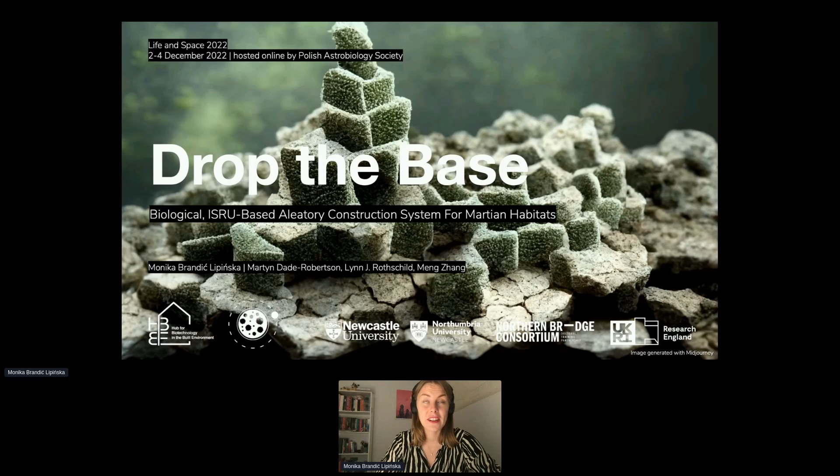So as Niels presented pretty well, when we go to Mars, we cannot take as much with us as we can to International Space Station or even to the moon, because it's much, much further away. So we have these two construction systems that we're using or planning to use right now. The first one is to bring everything from Earth, the same way as International Space Station was constructed. And the second one is in situ resource utilization, so basically the use of local resources.

The first one consumes a lot of costs because you have to take literally everything with you, and it's very costly to launch things from Earth. The second one also might be very cost consuming because of the machinery that we might need to process regolith, for example, to gather it, to sinter it, or create a 3D printing paste and 3D print and then assemble habitats.

So thinking of building on Mars, we kind of need an alternative approach or something to add to these approaches to make it more efficient. And that approach could be growth. So having this possibility of growing habitats, we might have structures that are capable of responding dynamically to the environment and are capable of maintaining and healing themselves because they're living, so they might adapt and change.

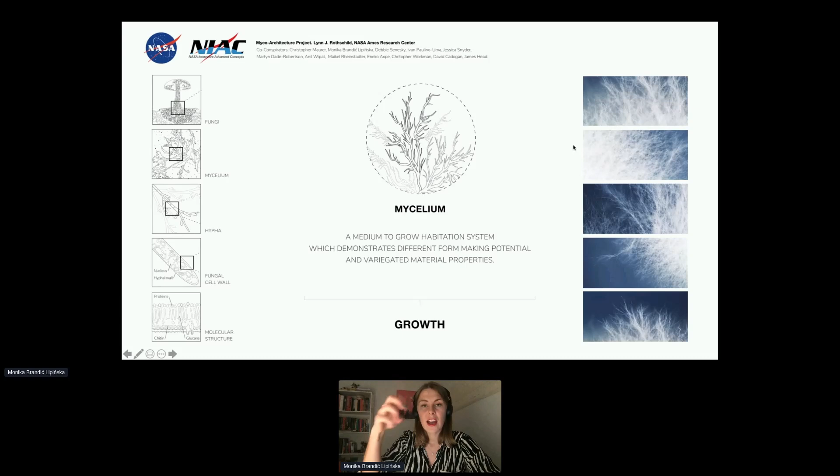So the project that I'm working on started when I was back in my internships at NASA Ames Research Center in Lynn Rothschild's laboratory, where we were working on the project called Myco-Architecture Off Planet, which was utilizing mycelium, which is a vegetative root part of fungi that you can see here on the pictures. It has this branching thread-like hyphae. And the idea was to use mycelium to build or grow the habitat.

The approach that NASA is investigating and developing is a standalone approach, based on inflatable structures. So basically you bring an inflatable bag, which is the habitat, from Earth. You add water, sunlight, carbon dioxide, which all is present on Mars. And then the structure grows and becomes filled with mycelium, and it creates this mycoshell structure.

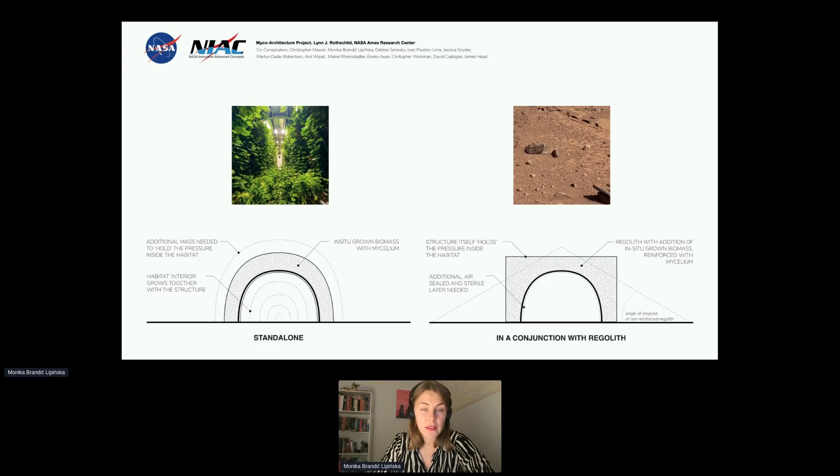The approach that I'm developing in parallel to NASA's project is an approach in conjunction with regolith. So I'm trying to use mycelium as a reinforcement for the regolith. So while growing it, I want to use minimum amount of biomass because we don't really have the biomass on Mars. That's something that we would create when the humans are there, and we will have greenhouses.

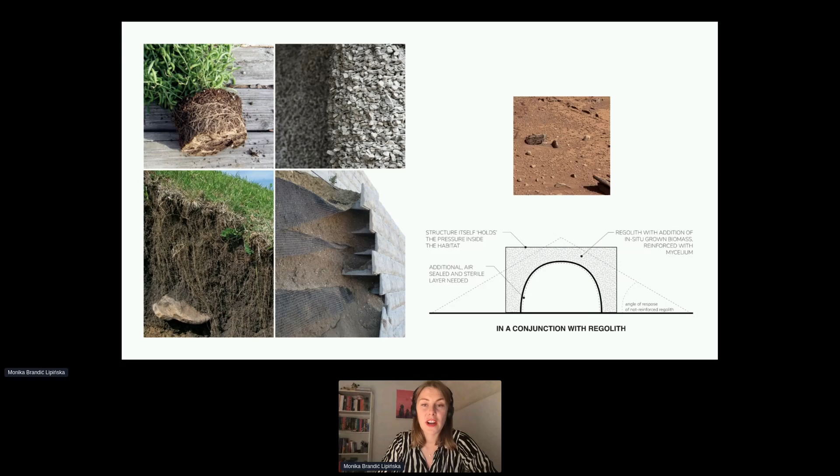But also the ideal scenario is that we would have this closed loop life support system, so we wouldn't really have much waste or plants that we can utilize for other purposes. So here the idea is to use the minimum of biomass and just somehow grow mycelium within the regolith, so it reinforces the structure. So the way mycelial components work is that mycelium, this vegetative part of fungi, secretes enzymes that dissolve their food and bond with the substrate on a cellular level.

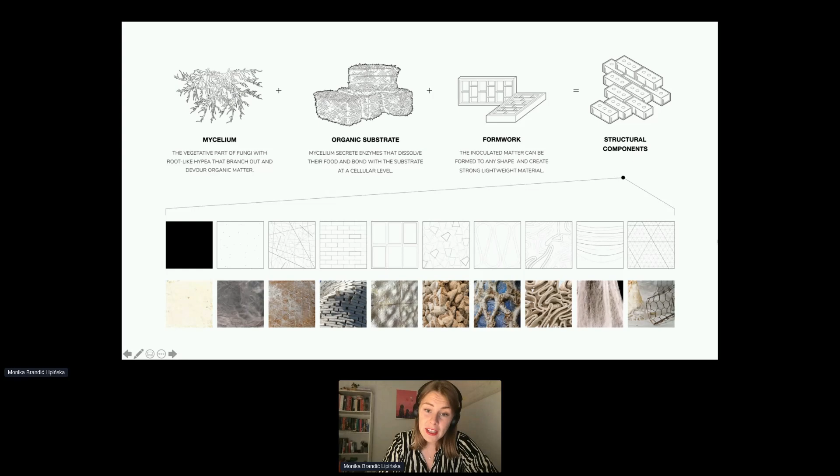So you can take any kind of organic substrate like beechwood or sawdust, anything that is lignocellulosic based, and mix it with mycelium and then put it into some kind of formwork. And then after a certain time of growth, you have structural components. And here on the bottom, you can see many different variations of that. It's either bricks or panels or smaller elements or 3D printed mycelium. So it gives a lot of possibilities of what you can actually achieve.

And it has very great properties, and it's been used on Earth more for artistic installations and small architectural pavilions rather than actual buildings, but it's also used for thermal insulation, for example, because it has very great thermal insulation and fire resistant properties.

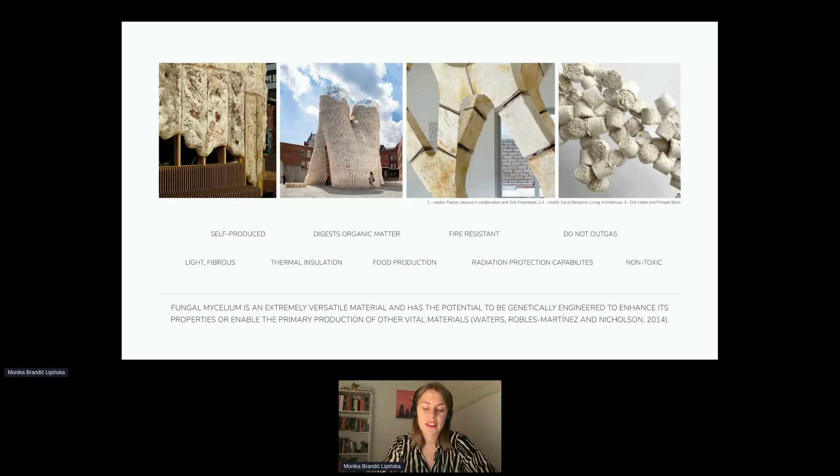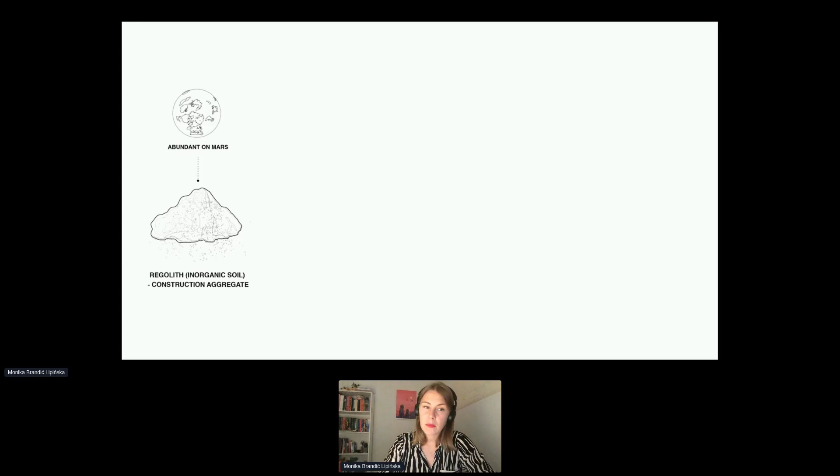But what is the most interesting for use of it in space is that it's self-replicable and self-healing. So we can take just a little bit of it with us and then replicate it in destination. So the idea is that we would use mostly regolith, which is abundant on Mars. And then for this organic substrate, that would be waste from the greenhouse, but just the minimum of it.

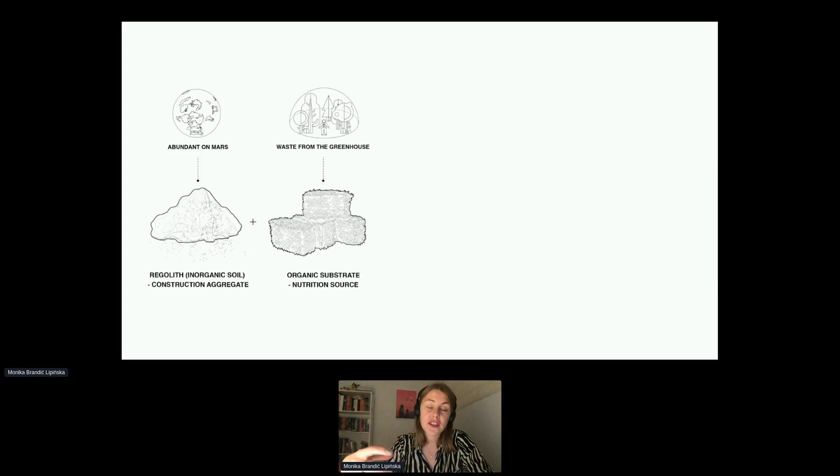Or it could be also like an algae or cyanobacteria that could feed on carbon dioxide present in the atmosphere, produce oxygen, and then mycelium use that to grow as a nutrition source, but also as an oxygen source. The other actor in this play would be mycelium that would have to be brought from Earth, but again, it could be replicated in situ, so we don't need really that much to take with us.

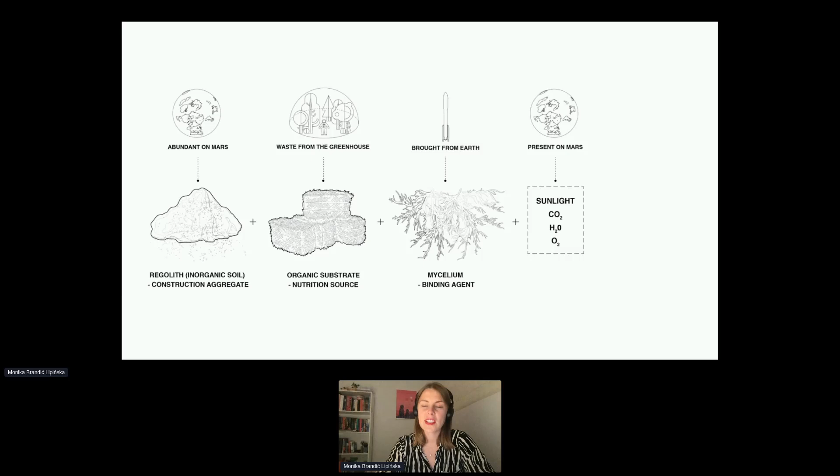Sunlight, not really necessary for mycelium growth, but in case of cyanobacteria, we might need that. Carbon dioxide, water, and oxygen, all present on Mars, or could be somehow extracted or processed. And then finally, we need some kind of casting, biowelding strategy of how to actually make structural components out of these elements. So this is what artificial intelligence shows when I typed mycelium-based habitat on Mars.

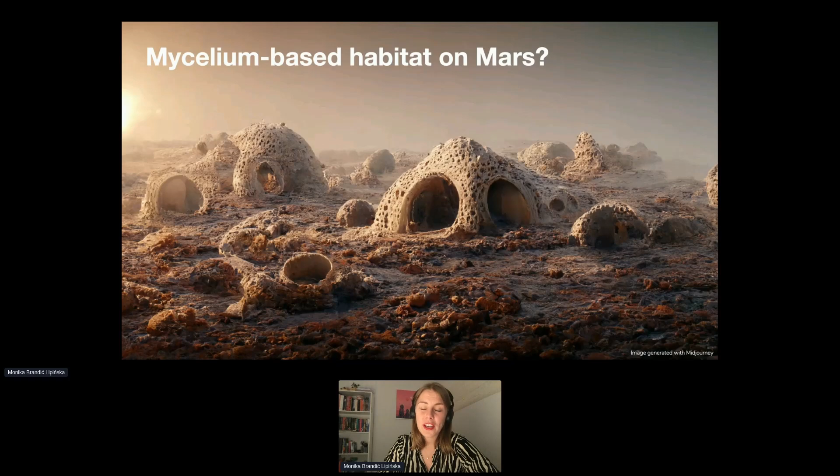And what I'm working with, it's a little bit more bottom-up approach. So I'm trying to figure out if it's even possible to grow mycelium on regolith and how it might interact with each other and what are the mechanical properties, and later on how it might translate into creation of the structure. So the goal of my research is to develop a biofabrication strategy for stabilizing regolith using mycelium to construct inhabitable structures. And what is really important is that it's in resource limited conditions. So again, I'm trying to minimize, for example, the biomass.

And that approach responds to a lot of different goals connected with human exploration of space and especially Mars, which are associated with creation of the habitat. So for example, reliability, long lifespan, planetary protection, where here it would be an additional issue to solve because we're introducing living material. So we have to make sure that there is no forward or backward contamination, and we're not spreading this new form of life on the Martian surface.

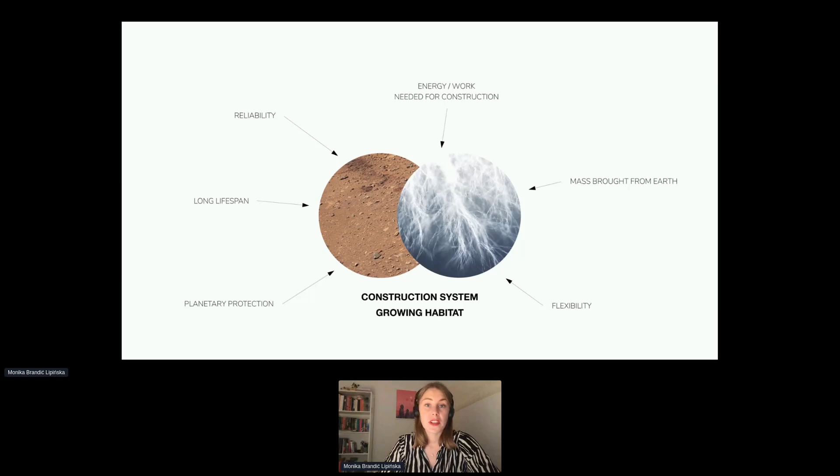And the other thing is the mass brought from Earth, that we're saving what we need to bring with us. And it gives us flexibility because we can grow the habitats or extend the habitats while the mission progresses, or with new mission types and mission needs, we can adapt the habitat to the needs.

There are additional aspects that in a far future have to be taken under consideration to make the project actually work on Mars, like environmental conditions, the chemical composition of actual Martian regolith, the nutrition source, because it will differ if we're using parts from the greenhouse, or it will differ if we use cyanobacteria or algae, and then finally mycelium species.

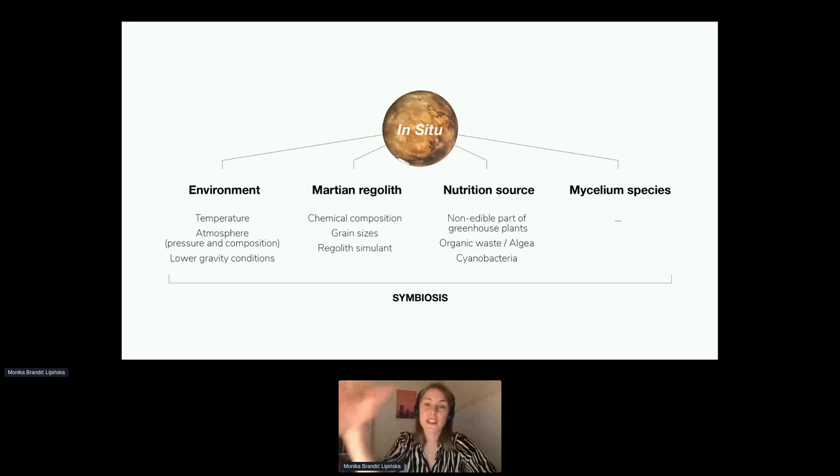So how to choose mycelium species and nutrition source that will be in symbiosis with the regolith and working also in these extreme environments. We wouldn't grow it just like that on the surface because, again, planetary protection. So there would have to be some kind of closed environment providing the right temperature, right pressure, but still these 4 elements have to work in a symbiosis and they have to be carefully chosen.

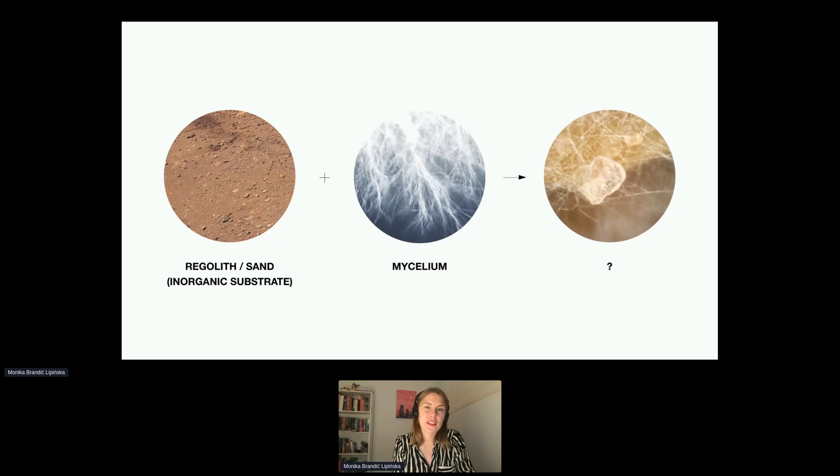Right now, I'm working with Ganoderma lucidum, which is one of the popular mycelium species used for architecture purposes. And for now, I'm working with sand, so not really regolith. So it might change because of the grain size and chemical composition. But I wanted to see if it's even possible and how the structure works and the interaction between these two. So I started with doing experiments growing mycelium on sand with a little bit of beechwood on petri dishes.

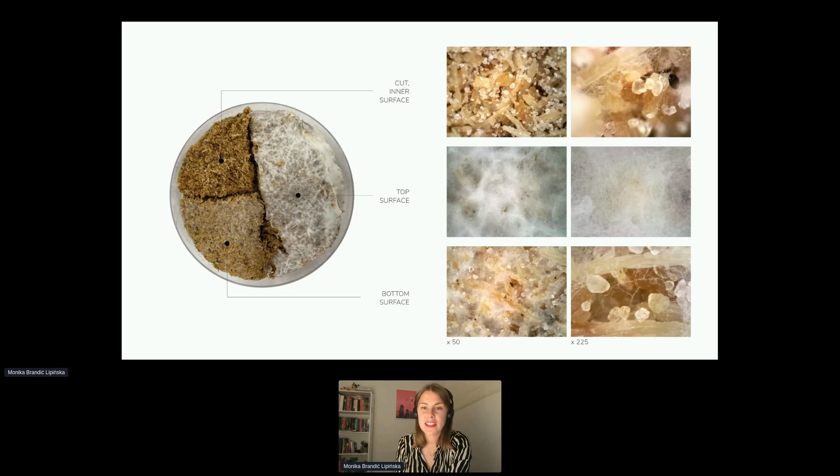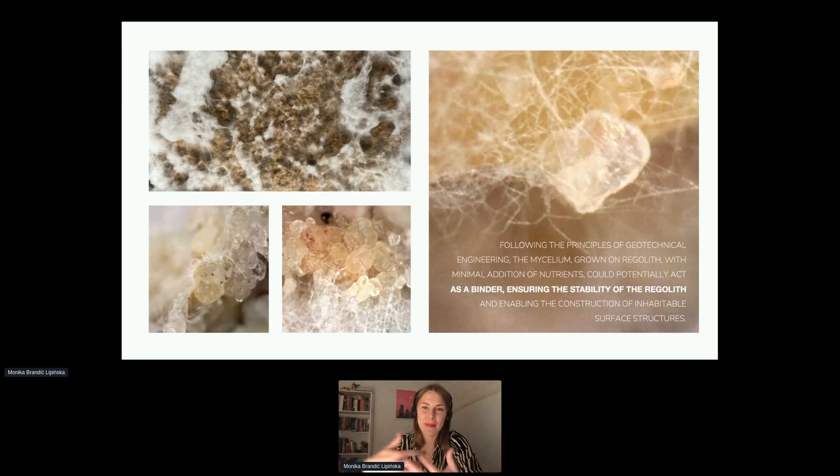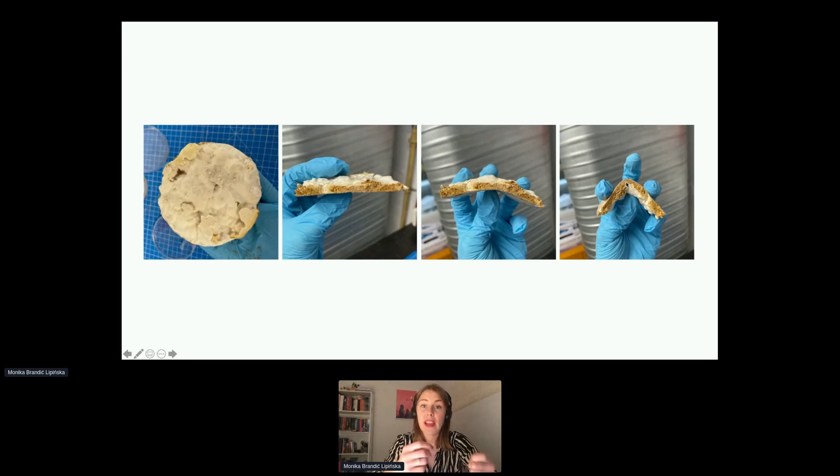And then after I figured out how to make this on a small scale, I moved to a bit bigger scale of a column, where here you can see this is 90% of sand in terms of the mass of the weight, and 10% of mycelium with biomass. So it's mostly sand structure that is made and held by mycelium.

You can see that it grows much more on the outside rather than the inside. There is still some growth on the inside, but what I observe is that mostly it's held by this, I call it like a graded surface binding, how the mycelium grown on the outside holds it.

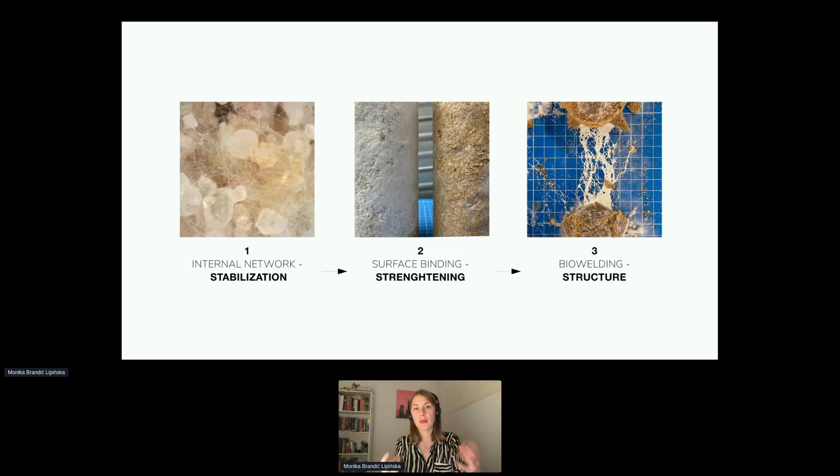It's almost like a bag holding the sand inside. So there are these 3 levels of interaction. The first one is internal network, how it stabilizes the structure, how mycelium grows inside. The second one is the surface binding. And then finally, it's the biowelding, so how the structure composed out of different elements holds together. And how we can construct that on Mars.

And the idea is that on Mars, where we have lower gravity, we cannot really rely on elements being held together for a long time, because these topological interlocking systems basically rely on the weight of the elements, how one holds another. But if we have biowelding qualities where the elements can grow in together, then with this topological interlocking, we can have a structure that is put together and then over time grows in together, and we have a solid structure that won't break.

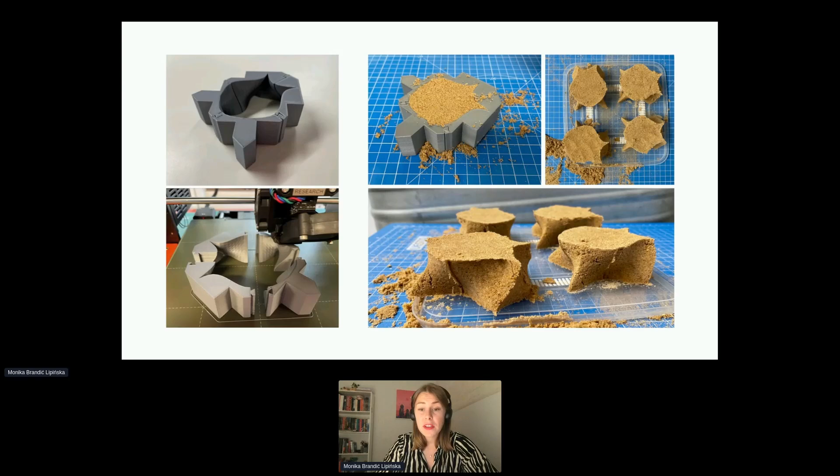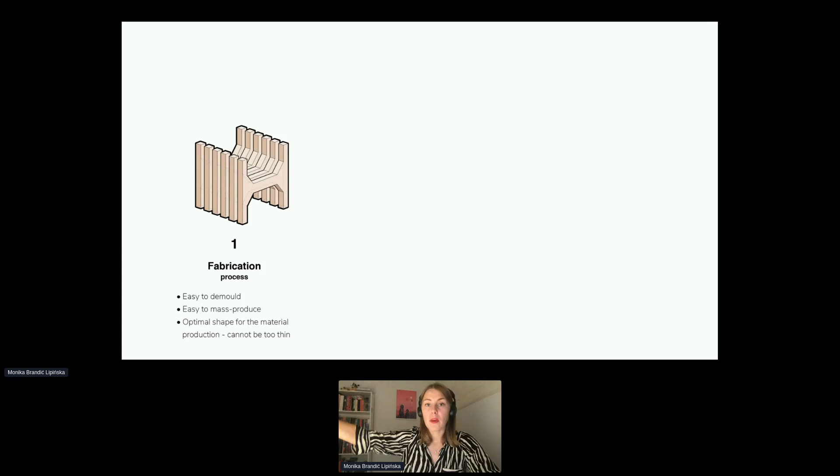So here again are some experiments that I was doing. The first ones with these interlocking shapes and how they might grow together. And now I'm looking into 3 aspects of how to actually design the best geometry for such project, for such conditions. So the first one is fabrication process. It cannot be too complicated. It cannot be a very complex mold, because eventually doing it on Mars, ideally automatically, it has to be as simple as possible. The second one is aggregation process.

May I interrupt? Yeah. There are only 2 minutes left.

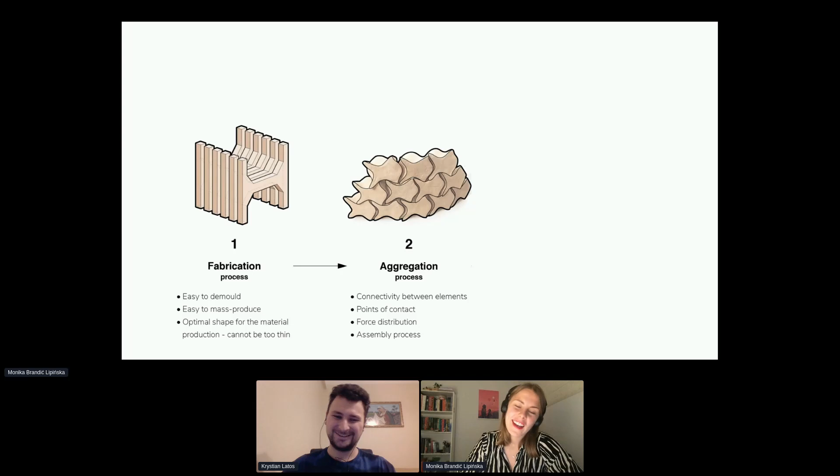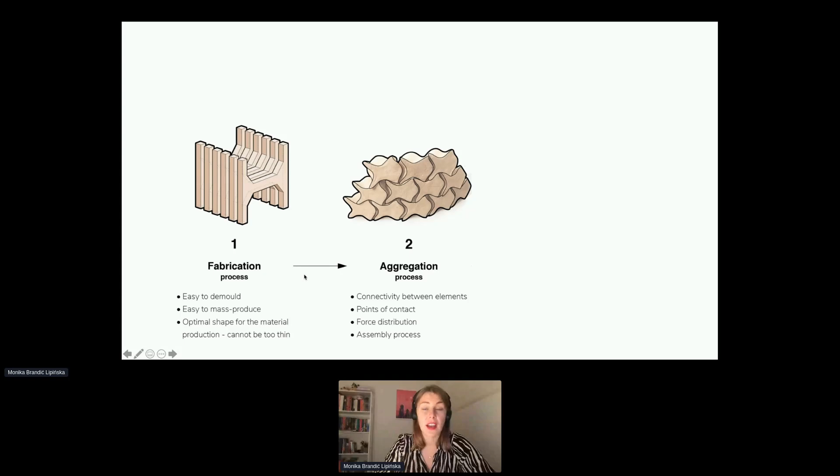Yeah, that's perfect. Thanks. So the second one is how these elements are coming together, how it works structurally, how, for example, you can have these elements that are almost like self-assembling, or elements that are like brick by brick that have to be put together. So this aggregation process. And the third one is biowelding process. So how the elements can actually grow in together.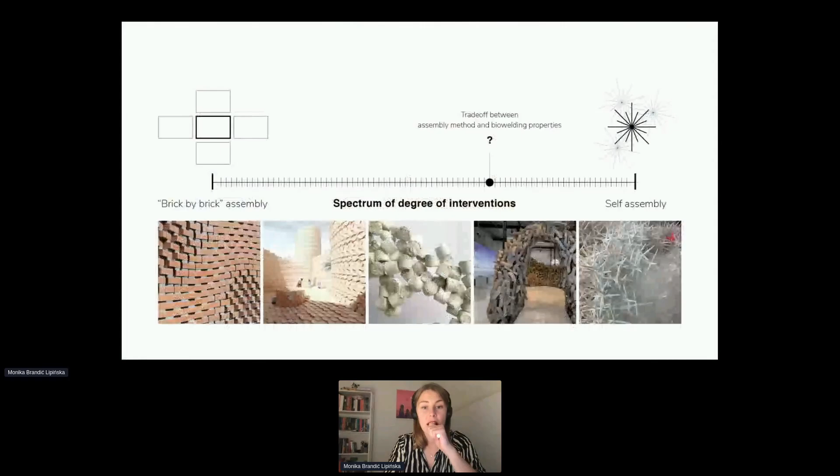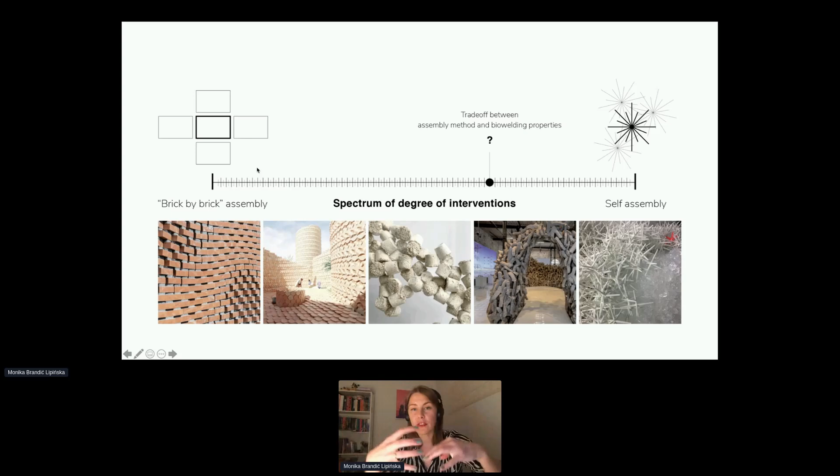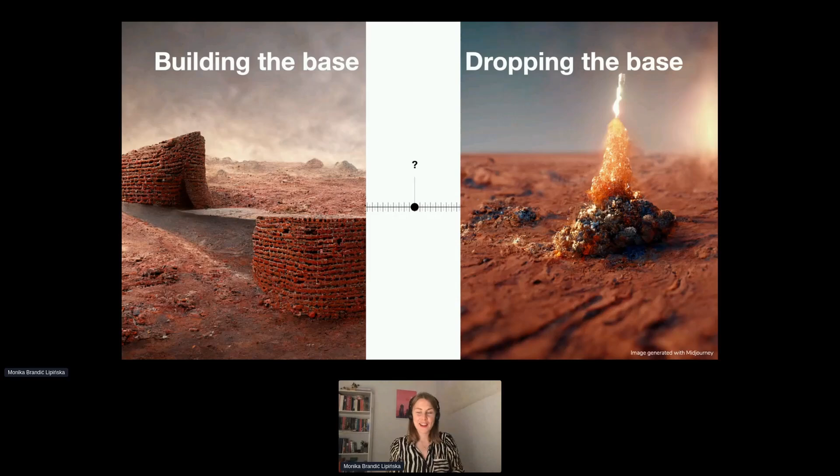So eventually it will be somewhere on the scale between putting bricks together where you need robotic operations, all the way to self-assembly where you literally drop elements and they self-assemble together. So somewhere on that scale, these self-assembled interlocking aleatory structures will be placed. So it will be somewhere between building the habitat brick by brick and literally dropping the base somewhere here. And that's what I'm working on right now, finding where it is and what exactly it is. Thank you. And I'll be happy to take questions as well.

And I don't know how to unshare my screen. Stop sharing. Okay. I cannot hear you. And now? Okay, it's just the phone.

Okay, so how do you choose the form in which you want to grow the mycelium? So it's basically these three elements that I was saying. So I'm doing computational simulations, for example, of how different geometries would interlock under Martian gravity, because if you drop elements, they would drop differently in our gravity and in Martian gravity. So that's one, computer simulation.

The other one is keeping in mind that it cannot be too complex, because first I have to manufacture it here, but eventually it would have to be manufactured there. So it has to be simple. And then the third one is doing experiments with just growing, let's say I have two elements, growing them together and seeing how they perform this biowelding, if the surface is big enough. So it's basically iterations of these three aspects, through computational analysis and actual experiments. I see. Thank you very much.